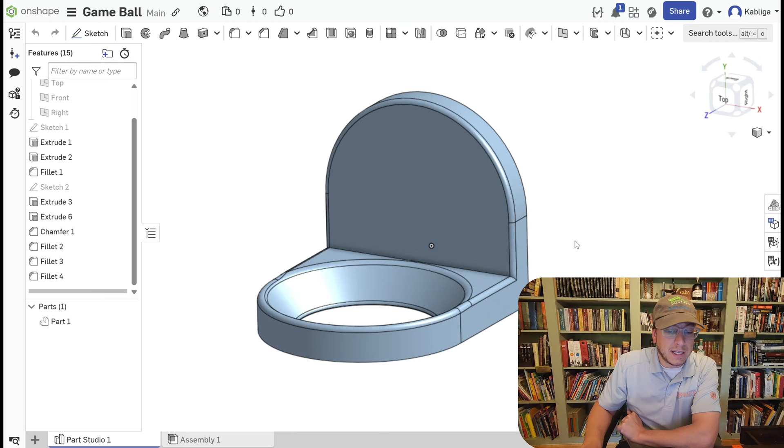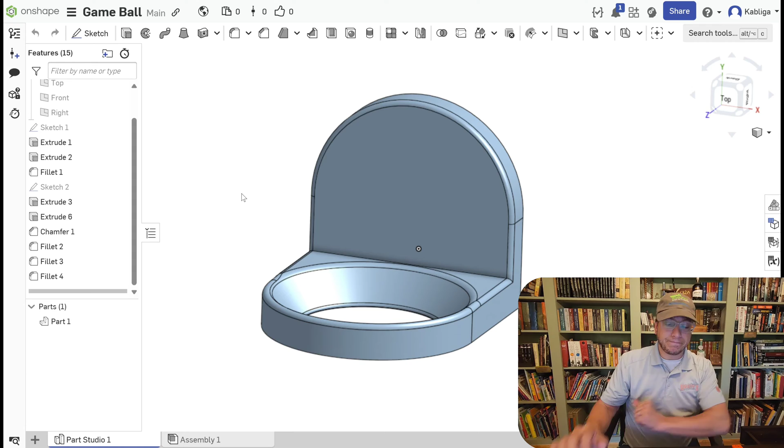So if you look at the video here, this is the Onshape design I have—very basic, not looking for anything super special. I might add some words, but if I do, I'll probably do it in the slicer software; I find that a little easier. There is the ability to add words right in Onshape, but following curves and things like that seems to work a little easier in the slicer. But I'm really thinking I want to leave it alone because they wrote right on the front of the ball. So for these purposes, this is simple and to the point.

Couple quick things I want to point out before getting into the keyhole designing: how did I come up with the size for the hole? There's all kinds of tools you can use to figure certain things out.

I could have just Googled how big a softball is, but coach pitch, T-ball, fast pitch—all of these change the size. You could just measure it with calipers, but I'm a strong believer in tactile feel and seeing what something actually physically feels like. Sometimes that means wandering around your home and finding the right thing. I happen to find a kid's cup, and it holds the ball perfectly, nice and stable.

So as long as I shape it down in that kind of curvature, it should hold this ball perfectly. I was going to do a circle on this backdrop for the inset, and I was looking for a shape to do that. I ended up not doing it, but I wanted to show you what I was trying to design. I actually found my good old Glencairn glass, if you like whiskey and follow any of my whiskey videos, and it was the perfect shape to make a more compact design. All I'd have to do is measure this and measure this.

I went through lots of different sized round objects in the house, and I happened to find two cups that worked perfectly. That's how I came up with the exterior measurements, and originally the backdrop measurements, which I've decided against. But I just like to discuss this - sometimes putting your hands on things is a very easy way to come up with the solution you might be looking for.

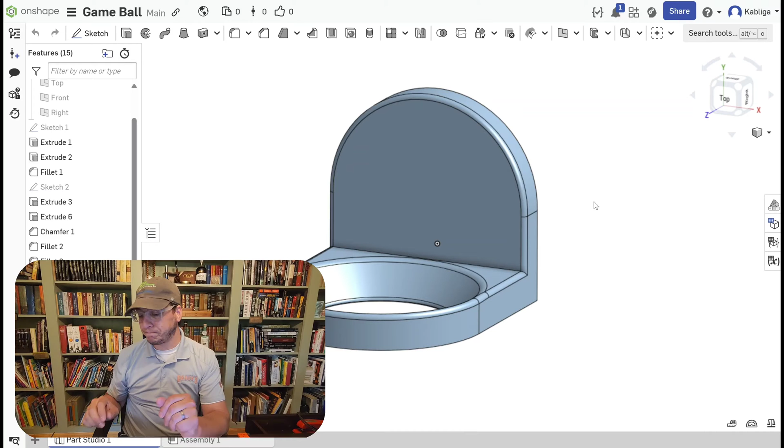So the next part is I want to add a keyhole right here. I'd like to not have a sliding keyhole where you've got to find the center and balance it, and then kids run around the room, the walls shake, and suddenly it's off center. Instead, I'd like the keyhole perfectly centered in the middle, so that when the screw is slid in, as long as it's perfectly centered, it will use the weight of the softball and the build to perfectly balance at the bottom. So even if it gets knocked or shaken, it should settle back down to the middle. That's why I'm putting that keyhole in the middle.

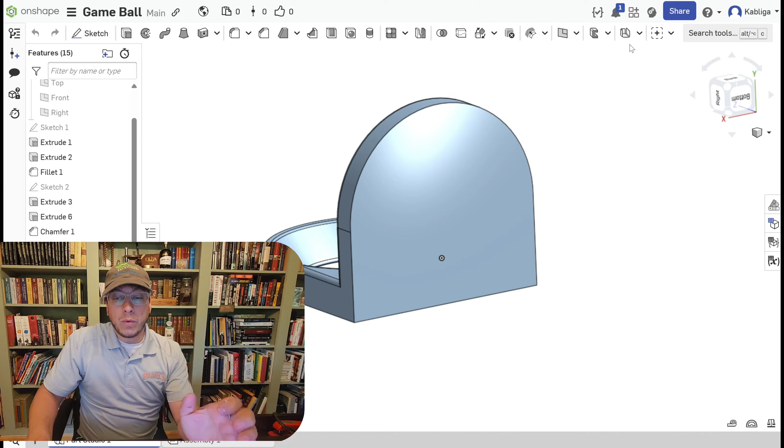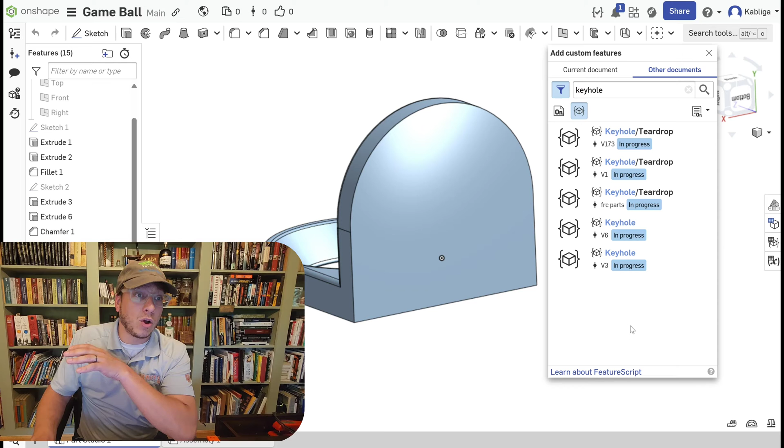In Onshape, there are a lot of custom features. You can search for keyhole and it'll show every project with that word, but I want to specifically look at features you can add - these are made by individuals and uploaded in their feature scripts. I tried all 5 of these, and had a lot of trouble figuring out how to use them efficiently in a way that made sense. By the time I got done playing around with it, I realized it would just be easier to use the knowledge I already have about Onshape and redesign it myself.

So what I want to do is show you how I did it, because it is very quick and easy once you get the hang of it, and I think it would be very helpful to a lot of people that make things that hang on walls.

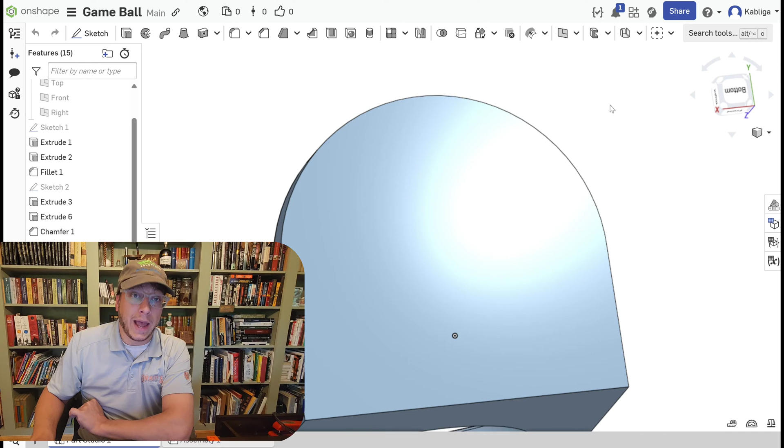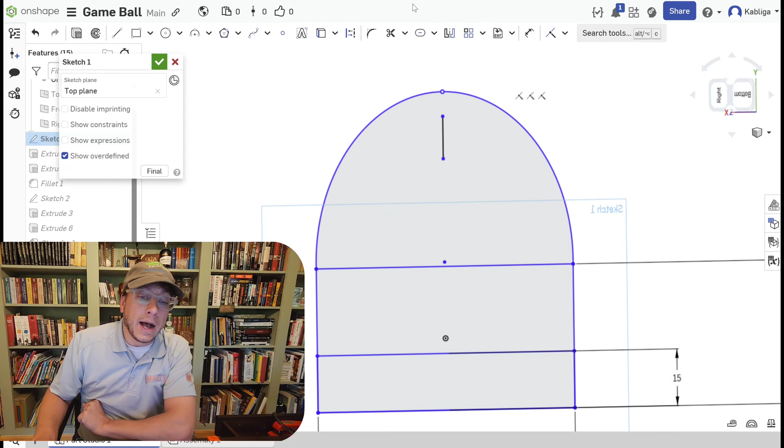First, let me open up my first original sketch. This was what I started with, very basic and simple, and I am going to get the line tool. I'm going to make sure I'm centering it because I can, and by centering it, I can make sure that weight stays based somewhere. I don't really care how far down I draw it or how long I make it right now, because I'm going to be adjusting that. But now that I've made the line, this is the start of the slot for the keyhole I'm making.

Let me put a measurement here, about a half inch, 12 millimeters. Then I'd like the overall slot - well, I don't know how long I want to make it. Let me look at this one and get an idea of where I'm putting it.

This is a very long slot because you're trying to balance it, so I don't need that - I just need it to rest at the top. So I guess I could make it significantly shorter than this. Just pulling out a standard ruler - oh, those are inches. Pulling out a standard ruler, I'm looking about 35, and if I center it, which you'll understand in a minute where the points would be, probably closer to 30.

That's a little too long for what I need. Probably be just as happy with about, let's do 20 millimeters. It won't hurt to have it be a little extra long. So let me come right here, and I'm going to change the measurement tool on here as well, and I'm going to make this 20 millimeters.

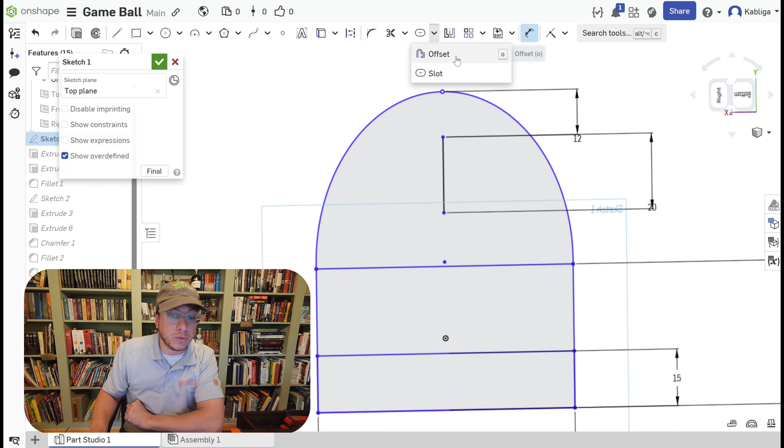So what I'm doing is basically drawing the middle of what the keyhole slot will be. The next step, usually the offset tool is the most used, so a lot of times that's what's written right here, but I'm actually going to be using the slot tool this time. If you've never used it, what it does is basically an offset, but it's going to make it rounded. So I'm going to select that line, and I end up with an offset that's going to be rounded along the top.

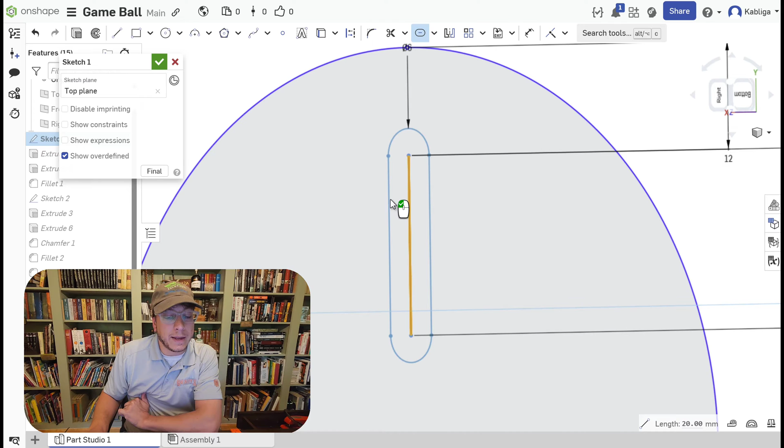You'll notice that there's a 6 right here for 6 millimeters. That is actually a measurement between these 2 points, the horizontal, or the parallel lines. That's what that measurement actually is. So how big do I need to make that? Well, let's figure it out.

So I need something that this can slide into and retain, so I'm going to use this tool. This is actually a tool I'm going to shamelessly plug that I have put on printables. It is fantastic, I use it all the time. It has 1 through 7, and then I also have 8 through 14. And what it does is, that's 7 millimeters thick, that's a 7 millimeter hole, that is a radius of 7, and the same on the front, 7 millimeter radius on the front.

So this gives me the ability to feel the size, to drop a screw in and see how loose is it, how much wiggle room do I actually have. And by doing so, there we go, the 6, very easy to get in and out of. I want it to be able to slide up and down, I don't want it to bind, I don't want it to be too big where you end up with so much wiggle room that maybe it doesn't end up centering and plumb bobbing itself. So it looks like here, 6 millimeter would be a good size for a slot on here.

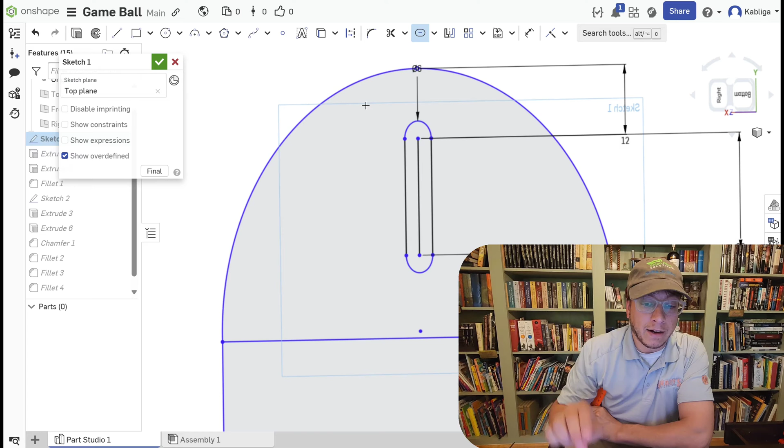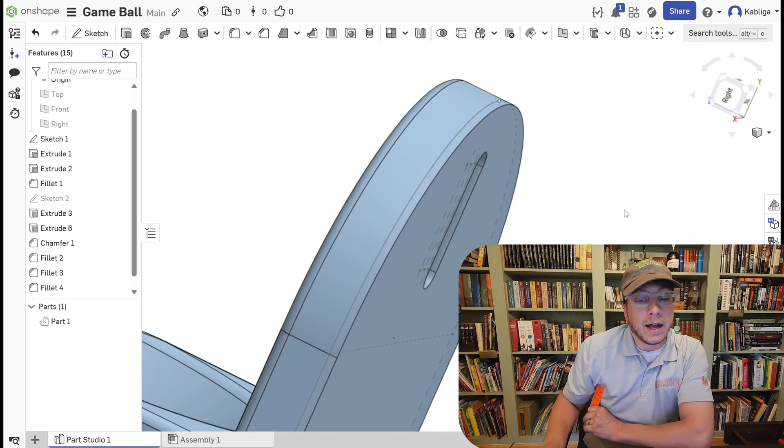So funny enough, it's already set to 6, so I'm just going to leave it there at 6. Now here's what's going to happen. Since I'd already designed it and I had already extruded it, the moment that I added a circle, that circle is no longer part of the extrusion. So the easiest way to do it, I like to have my sketches visible anyway, is go to my original extrude, select that, and now it is flush because that has also been extruded 10 millimeters as it was before.

Now there is a hole here. All right, sorry about that cut there. I actually had forgotten that I had tinkered around a little bit and I had done an extrusion that I completely forgot I had to undo so I could then show you what it was I was doing.

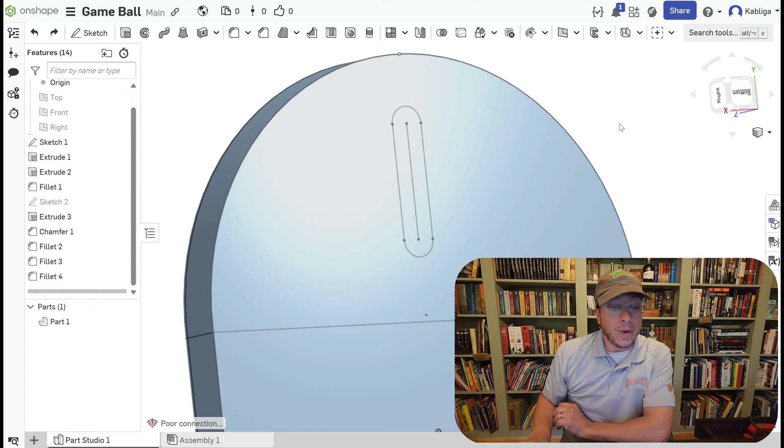So anyway, I've got the circle cut out for my slot, and I know it's going to be 6 millimeter. And how deep do I need to make it? Well, this is 10 millimeters deep because I know that's how big I made the original sketch before I extruded it. And, you know, looking at this, just want to show you guys an example. Sometimes you can make the slot too tight to the point where you tighten this into the wall, into the door, whatever it might be, and then you get the screw in and it just won't lock into place because there's not enough room to get it to go up and down in the slot.

So you want it to be tighter in an environment where it's going to be moving around. You're going to want it tighter maybe if you're hanging it on the back side of a door, it's getting opened and closed. But if it's just going on a wall, you can kind of play it loose with your figures, with what it is you're trying to measure out here.

So what I'm going to do instead is simply take my calipers. I'm going to find out how big is the head of the screw. And then from there, I'm going to stretch it out a little bit. How much? I don't know, just a little bit of wiggle room. And yeah, that would be enough without being too much, that if this is what was actually holding it in place, I think that would work.

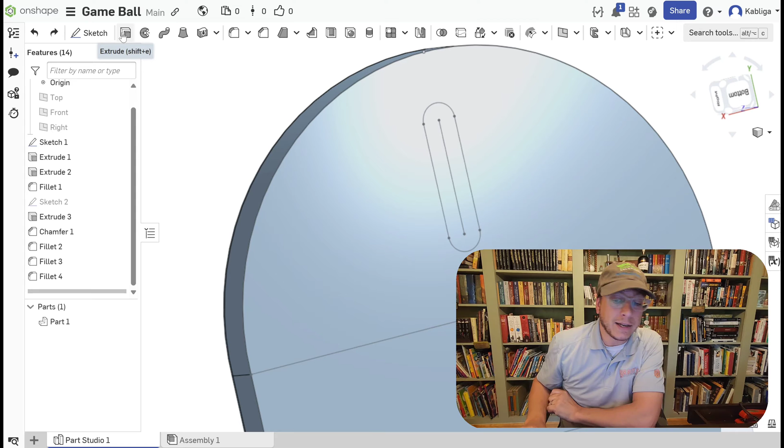That's exactly 5 millimeters, and I like even numbers, so that's what I'm going to do. I'm going to make the slot that actually holds the pan head 5 millimeters.

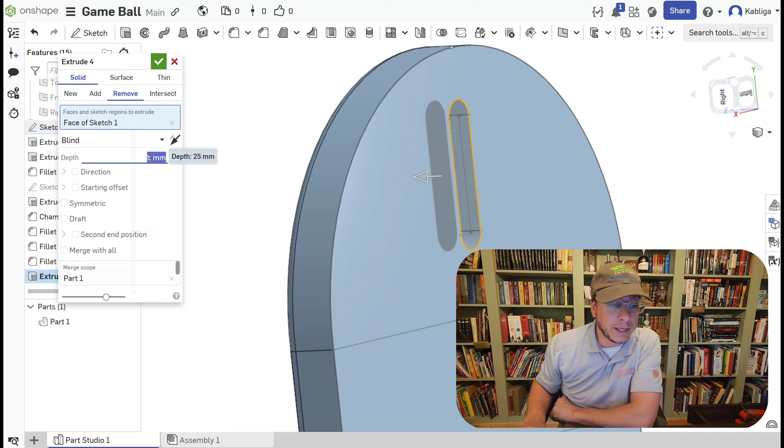I'll start by selecting that part of my sketch and extrude it. I do not want to add, I want to remove, so I'll go the opposite direction, but I don't want a hole all the way through. 25 millimeters is too much, so 5, enter. Now I should have a 5 millimeter slot right there. Perfect, exactly what I wanted.

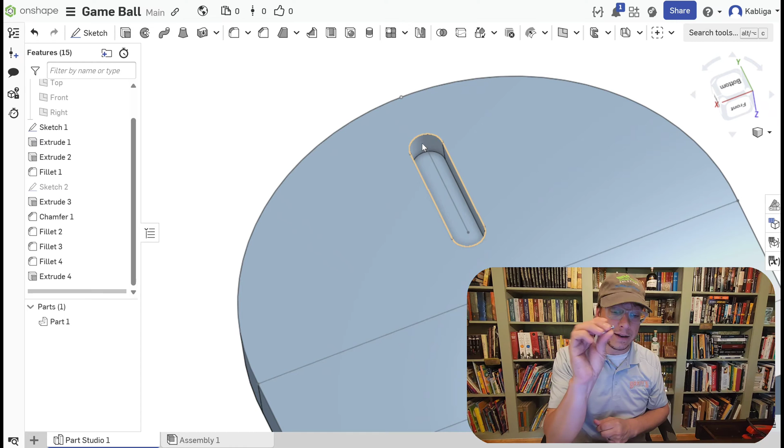Now you'll notice the slot is flat at the top right here. If it was a piece of plastic perfectly flat, and you try to hang a screw from it, it's just going to slide off, there's nothing to hold it in place. Also, this slot will only hold the threaded part, there's nowhere for the head to go in. We're getting there, don't worry.

What I've found works really well, there's a couple different ways of doing it. First I'll tell you what I don't like. One, you could offset the inside of this and end up with more of a structure like this, where there's a flattened area right here.

The reason I don't like to do that when I'm creating something that I hang is this was created by a router bit - went in, down, back, done. Super easy. But this is going to have to be 3D printed, and when I go to print it, this little standout section will be sticking out in multiple directions and it's going to need some kind of supports. If you're okay with a bed support up to here, or a support from in here, people aren't going to see the backside of it, you can rip it out with pliers, you'll be good to go. But I really do like to design things that need absolutely no supports - less likely to fail.

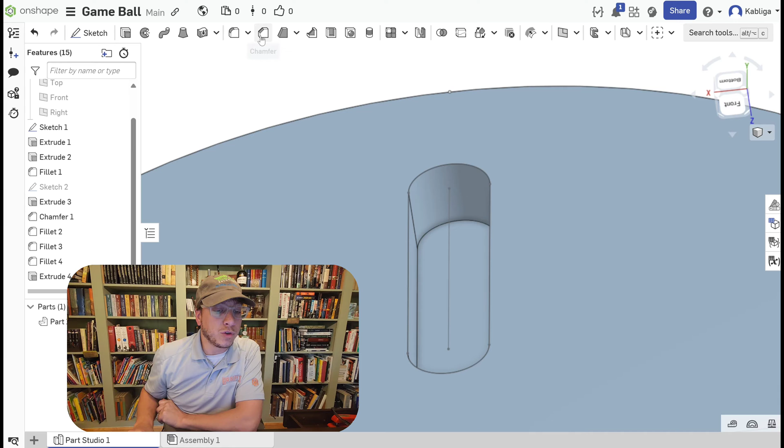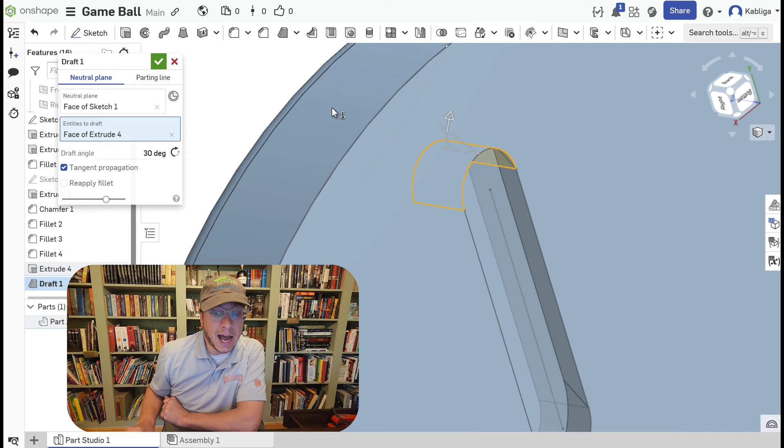So that's definitely what I prefer to do. I'm going to click right here and click the draft button, and it's going to suggest 30 degrees - that's just where it defaults to. Let me select it again, apparently I had not. There we go, now it has a 30-degree draft. You'll notice it can't just draft one side, so it ends up drafting the entire opening all the way around, which I don't really care about at the bottom, but it's not hurting anything being drafted all the way around.

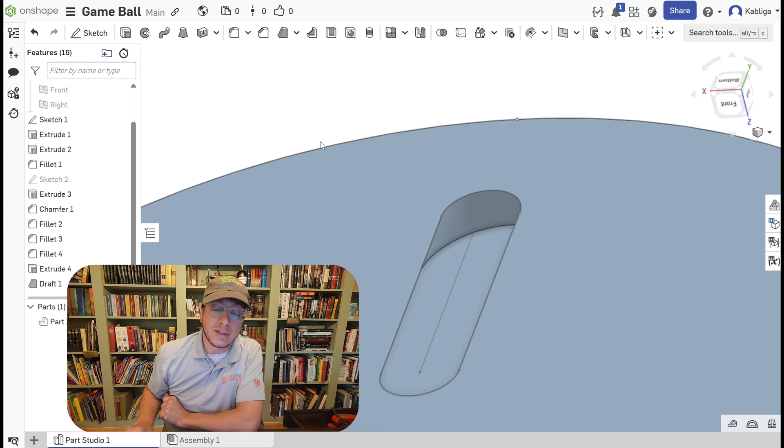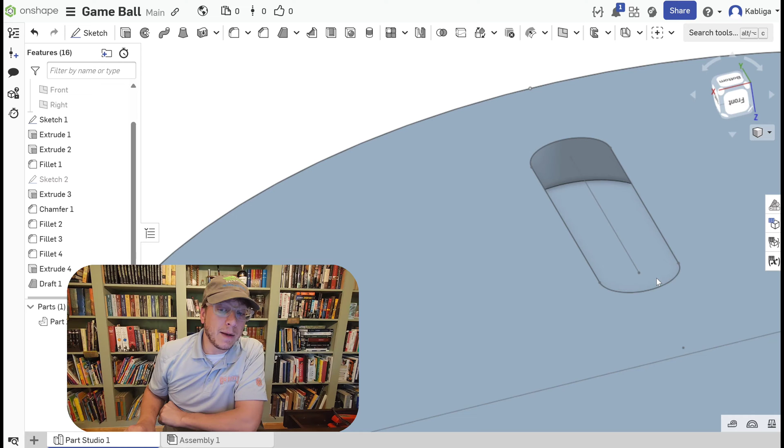30 degrees, I've actually used it in the past and it works fine. I found that out because I tried it once at 30 degrees and it worked, so I left it there. Now I have that draft set, and you can see it's now a slot where the inside is bigger than the 6 millimeters, which means it's big enough to hold this. If you really needed to, you could grab the measurement tool down here and measure inside to inside to make sure. But at 30 degrees it's expanding pretty drastically, so I see no reason it wouldn't fit - though after I print it one time, I guess I could find out I made a mistake and should have pre-measured.

But you'll see here, this point is extremely sharp - it's going to be 1 layer line thick, and that's not going to be enough. The weight, even if lightweight, pushing down, is going to start bending the plastic, and unless it bends specifically at this point, you're going to end up with something that got knocked sideways. Maybe the item got put back one day and got knocked a little sideways, and now it doesn't hang level. You don't want to have to reprint this.

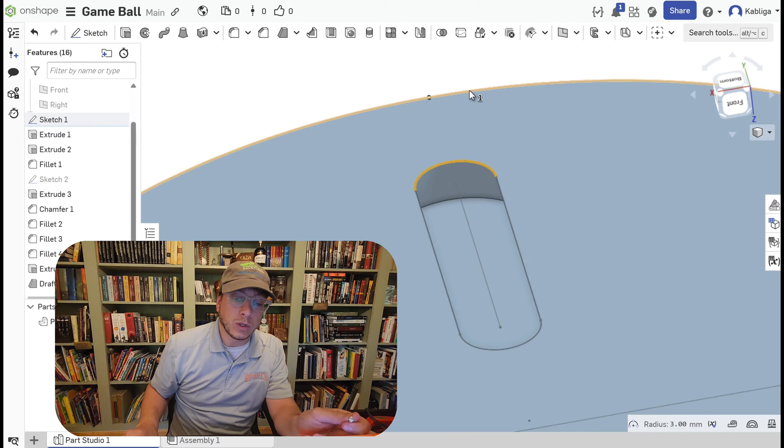So the easiest way I've found to really support this and build it up is pretty easy. I made this thickness 10 millimeters - I actually wanted it thicker than that, you'll notice this is thicker. So what I'm going to do is select all 3 of these surfaces here, because there are 3 in my design.

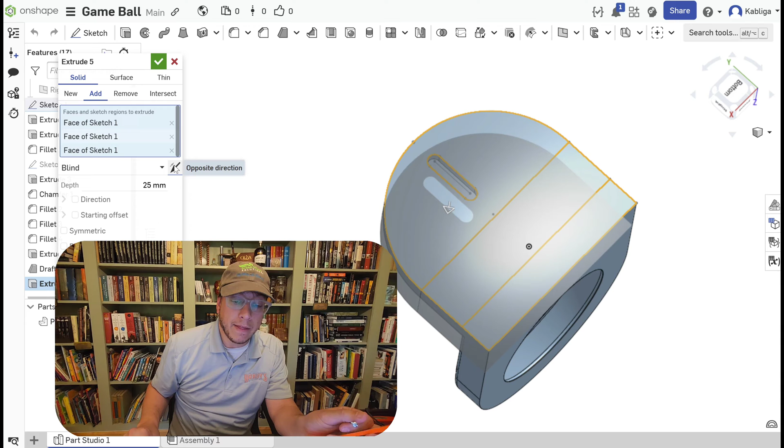If there was only one, I'd only have to select one. I'm going to add yet another extrude. This time I'm going to thicken it. Don't need to remove, that's not going to do any good. So I'm going to thicken it, and I'm going to thicken it by how much?

Let's get an idea, again using this gauge right here. So, 1 millimeter, it's not really going to add a lot of flat space. It is a little bit flexible, but that's okay because, again, you're going to have at least 1 layer line. 1.5 seems pretty good. 2 seems pretty good.

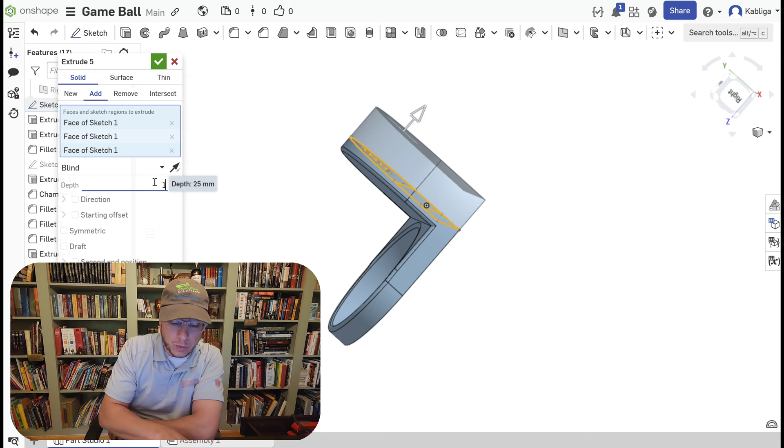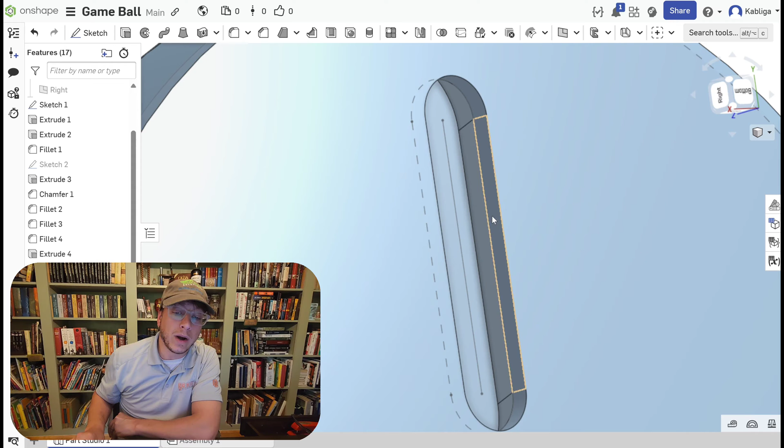That'll give me a good hold. I think I'd probably be good with either 1.5 or 2. To save on plastic, let me just use 1.5. This is going to be a very lightweight piece, so I'm not really that concerned with it being damaged. It's probably never going to be touched again after I hang it up. But now you can see that beyond the draft, the chamfer kind of going back in here, I now also have this 1.5 millimeter flattened surface that should end up being a couple layer lines and will add to the durability of where it's actually going.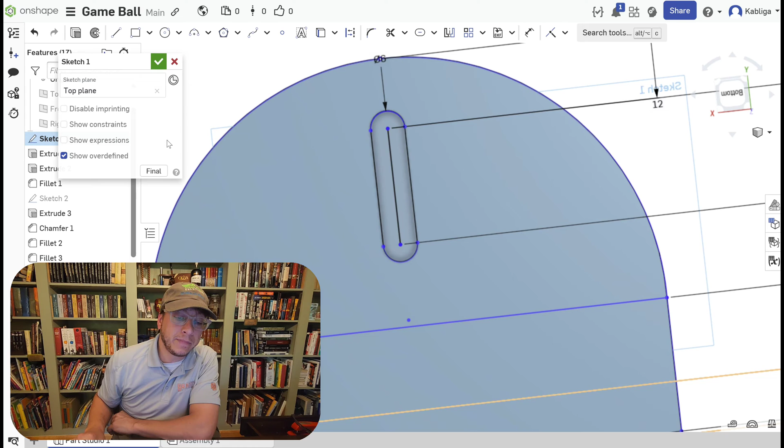So now we've got our slot built. We've got our inside inset to hold the head of the screw without having an issue. What's next? Well, let's go back to our sketch number 1. And the great thing about building 2 lines and having this slot is it rounds it around the perfectly centered place right here. So what we're going to do is we're going to grab a circle, center point, and we're going to make a circle.

And I don't really care how big, because now it's time to make a measurement and figure out how big it needs to be. You could, again, just grab calipers. This is 8 millimeters, the size of that head. But again, that doesn't really give you any kind of tactile feel. I can make it a little bit bigger and I can kind of see.

If I had something around the house, oh, I sure do. I have a measurement gauge. I could simply put it through this hole and see, is that going to be big enough, right? Which, this is standard measurements. I've got a metric one around here. So, a 3/8 inch hole is pretty sizable. It works pretty well, it goes in and out, no problem.

You can use anything. The hole on the end of this ruler, that's not going to fit. Nope, sure doesn't. But if it did, you'd be able to get an idea of something, how does it feel, especially if you're using something else. And so what I'm actually going to judge mine on is this hole right here. It's nice, perfect size, have it in the house. I know that it fits through there.

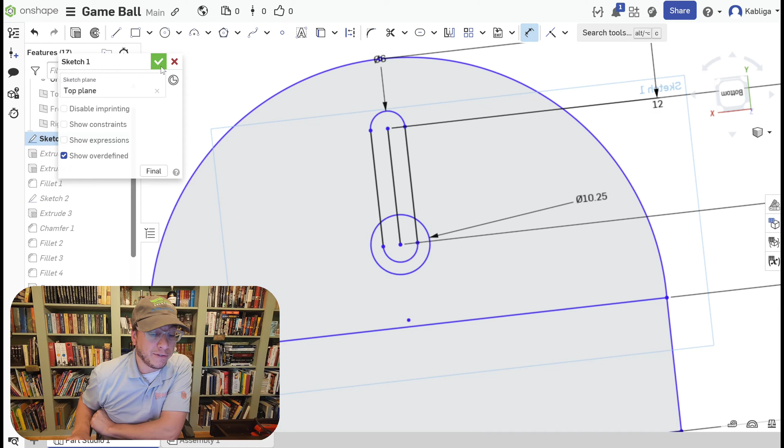So I'm going to take my calipers, measure the inside of that hole, and it is 10.25 millimeters. So let me grab my dimension tool, and I'm going to set it over here, a 10.25 circle. And watch what's going to happen whenever I hit check, because this is kind of funny. I have drawn yet another circle, and what did it do? It put a hole all the way through.

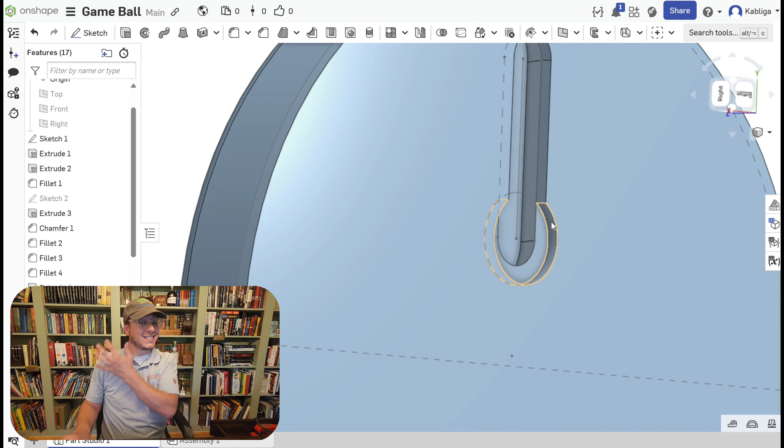And if you remember what I did last time, I'm going to go back to my extrude number 1, the very first one I ever worked with. I'm going to re-extrude that. I'm going to add that to what has been extruded, and look at that. It is flush on this side, and now on the back side, it is inset by the 2 millimeters, because I did not extrude, or 1.5. I did not re-extrude the 1.5 millimeters here, which is okay.

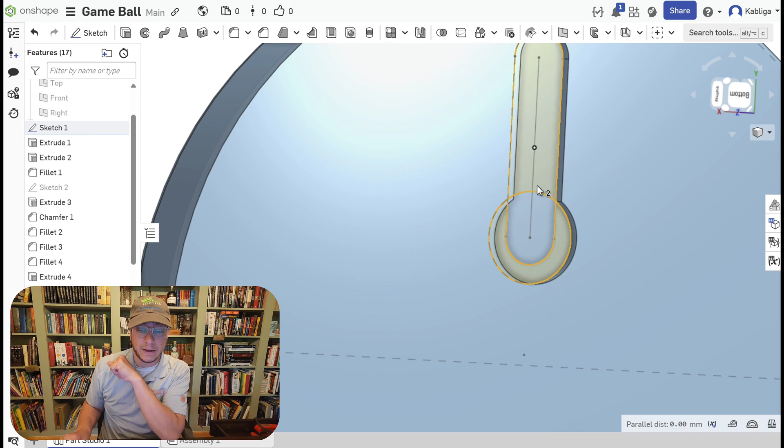Instead, I'm going to go back to my extrude number, let's see, 3? Nope. Where's my extrude on this one? Stop selecting things, eventually I will get there. This is extrude number 4. All right, so I can just add to extrude number 4 this right here. And you'll see now my keyhole is extruded the same depth.

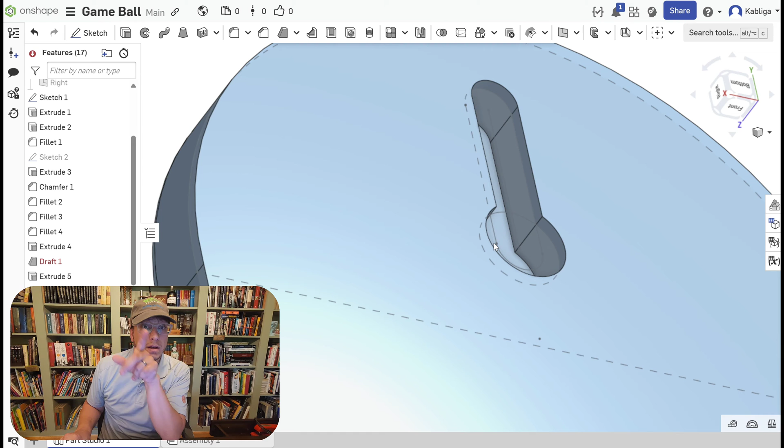Cut that. That did not work, because what that did is it destroyed my draft. So I'm going to undo that, and I'm actually not going to cut that out of the video. So now I just need to know that my extrude number 4 was 5 millimeters. Remind myself of that. Click on this, and I'm going to do a new extrude, and I'm going to do another removal, and I'm going to go in the other direction.

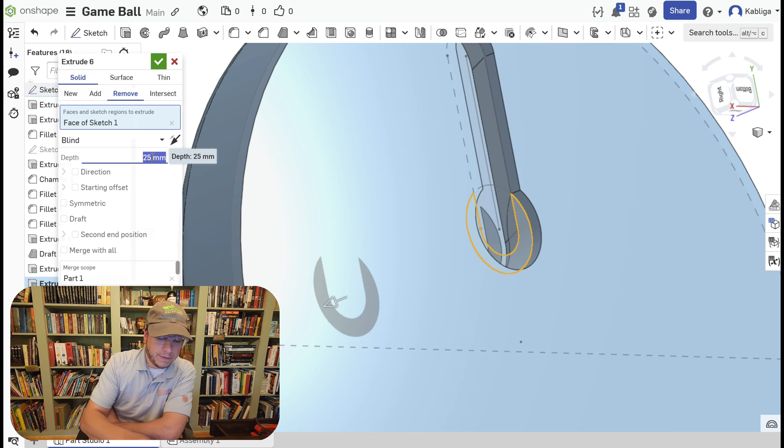I'm going to go 5 millimeters, and you'll see that it now lines up perfectly, and did not mess up my draft. See? So we all learn. I definitely made a mistake there, but that's good.

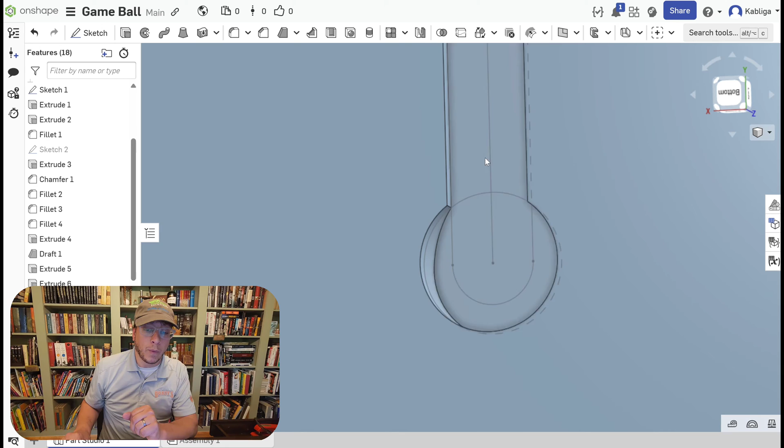Now you can see that the keyhole is large enough to allow it to go in. We know that because we tested it. We now have a slot built all the way up through here. We also know, because of the 3D printing design work, that this was exactly underneath the middle of this arch, so it should hang plumb no matter what I do. There is a very basic, straightforward keyhole that should print without the need for any supports whatsoever.

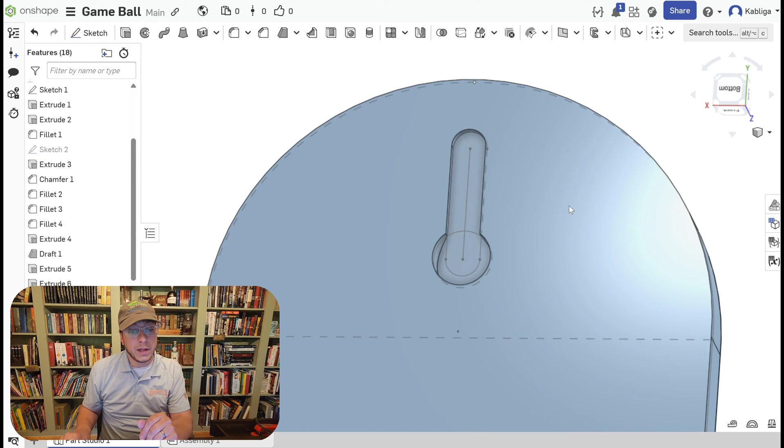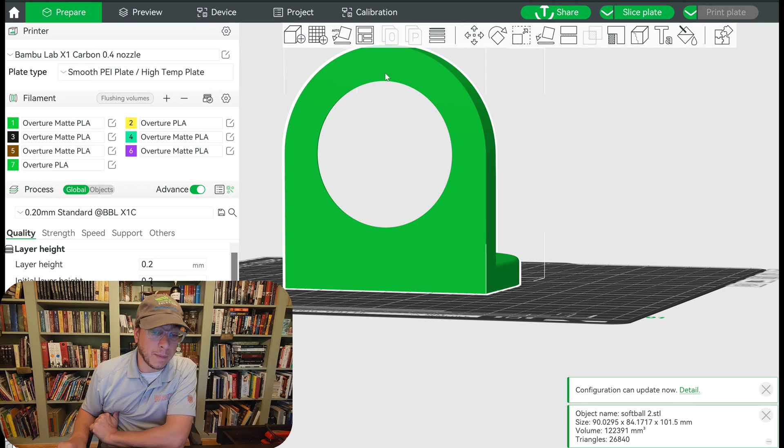Let me jump off here and put it in a slicer and see what it looks like after that. All right, so here we are in our slicer software, which of course my AMS is out of sync again. You'll notice it put it with the keyhole down, which would require supports. Maybe not, it could probably bridge those lines pretty easily, but it would definitely require supports up at the top of the circle of the opening. So not interested in doing that, but it laid it this way because when I designed it in Onshape, this was the back of what I designed, and that's why it did it that way.

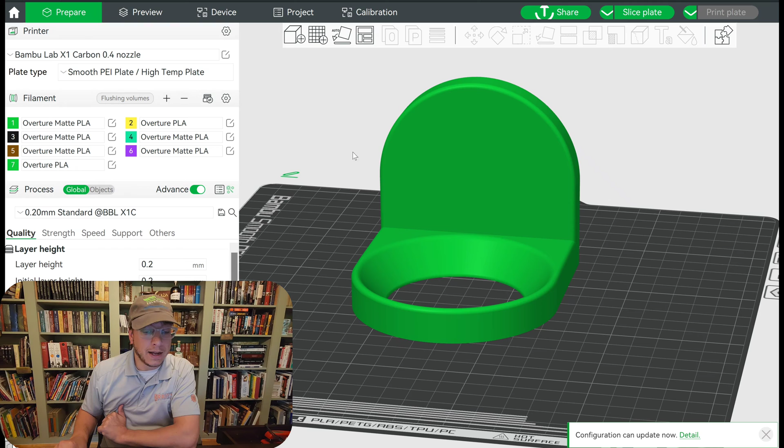But anyone who's printed, y'all know, lay on face, there it is. Super easy to do, put it right just like that. Let me change this color to a different green. All right, that PLA, let's slice it and see what this looks like.

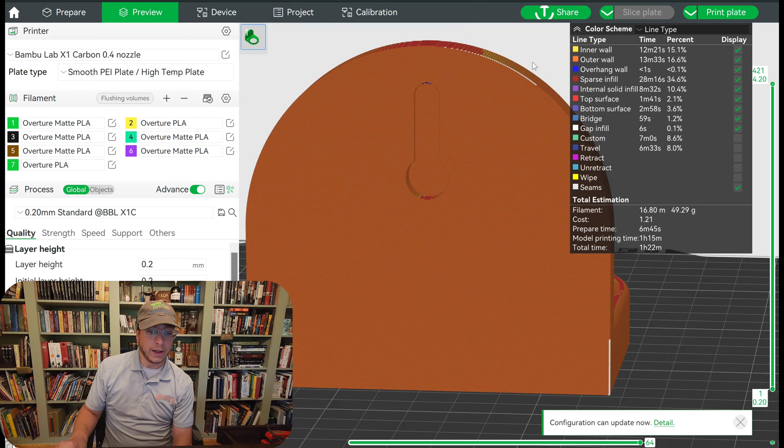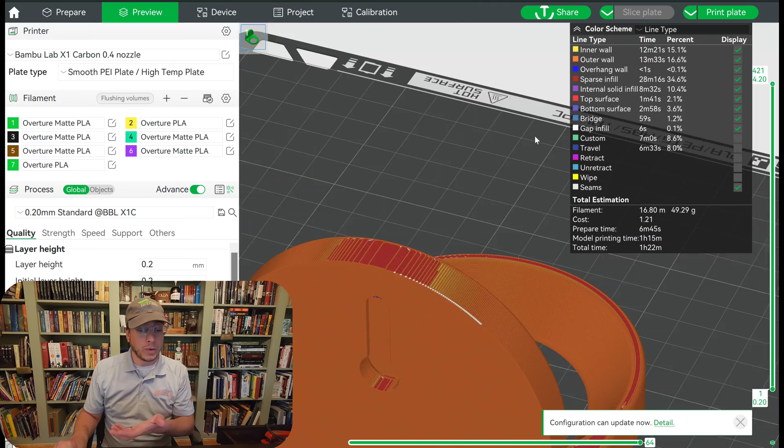All right, so here it is. You'll see the only place with any overhang whatsoever is right at the very top of the keyhole, and there's very little. It looks like there's 2, maybe 3 layer lines worth that it should not struggle with at all, but y'all know how it works sometimes. Up inside there, there's a little bit, but because I built it the way I did, with a slope instead of just carving out a hollow piece, it's able to actually build up to it. So I should end up with very little need for any overhang.

There's definitely not a need for support here. This will take 1 hour and 22 minutes on the Bambu, and I'm going to change some of these settings to make this top end just be a little bit smoother, and then we'll go take a look, see it printing, and see how this works out.

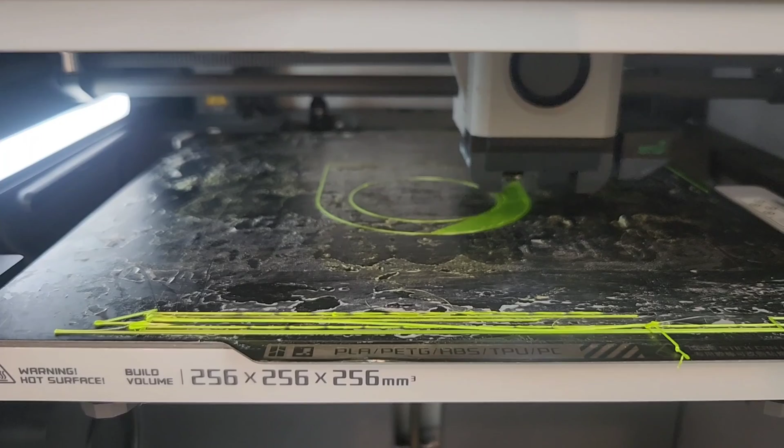Oh my God, would you look how dirty my build plate is? Yeah, it's because I never, ever clean it. For those of you who are new to the channel, you may not know, I really don't clean my build plate. It looks nasty, it looks disgusting, yet it still prints perfectly fine.

I do have my enclosure, my Ender 3V2, my Prusa Mark III Plus that I plan to upgrade, and my Bambu in the middle. The reason I like to use the Bambu is because right now I have no idea if this is going to work, or if it's going to look good or bad, and it's going to be the quickest to print. But if I end up printing in PETG to make it stronger, I'll probably end up using that. Anyway, let's see how it turns out.

All right, everybody, there you have it. Ball stand ready to be hung on the wall. Keyhole on the back. Put a hole in the bottom so it nice and holds the ball. Actually, kind of looks like a toilet with the seat up. Very classy, I know. But you'll see, perfect keyhole, slotted on the inside, nice round bottom, ready for the screw to go in. Already tested it out, hangs on a wall just fine.

You're gonna see I'm gonna upload a couple more of these designs, including a size for a baseball, a size for a golf ball, first hole-in-one, things like that on the golf ball ones, because there's really not much out there to brag and display whenever that does happen, if it happens.